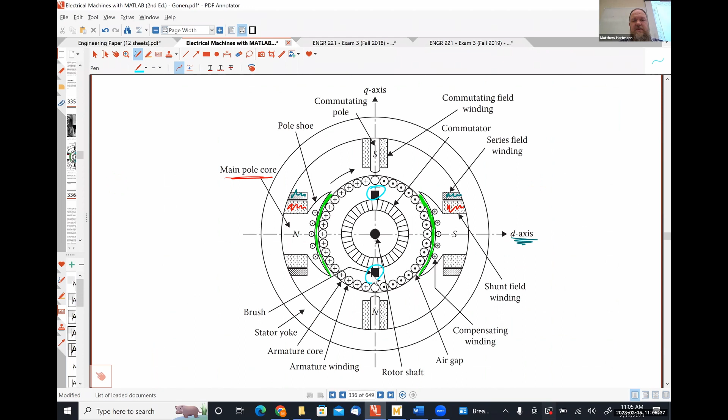close out all these windows for me talking about electric motor stuffs. And then circuits 1 exams.

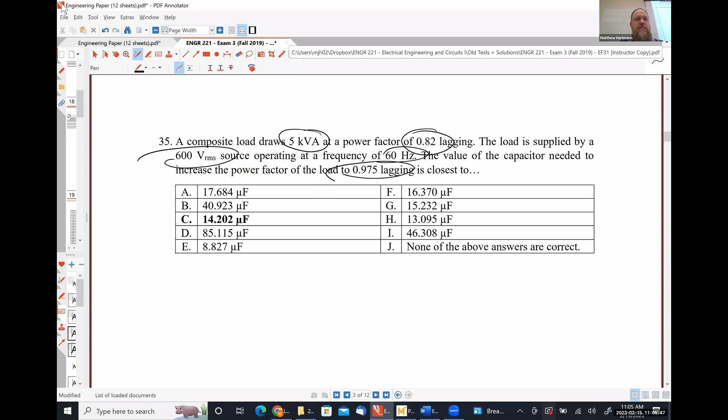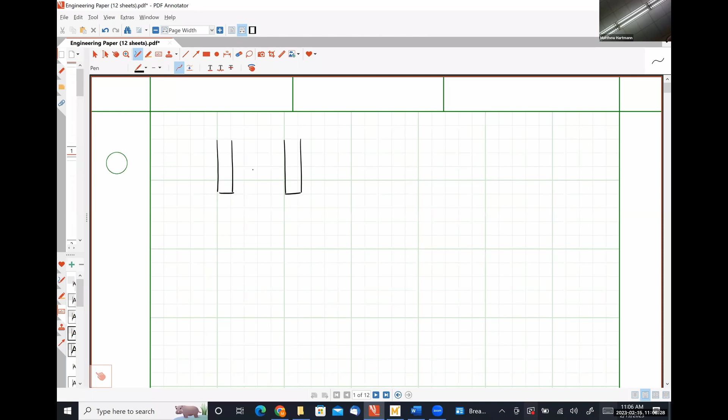So the question that was posed is one of the questions that I posted on the review thing. Why do transverse comb drives suffer from or experience a pull-in effect while longitudinal comb drives do not, right? So in a transverse comb drive configuration, let's say that these are a set of stationary fingers, and then here in the center is our movable finger. So in a transverse configuration, our movable finger is moving from left to right.

And so we see that this distance between our capacitor plates is what's changing, right? And the pull-in effect occurs when we have parallel plates and one of them is moving towards the other. In a longitudinal comb drive, though, we have the following situation, where our direction of plate movement is like so. So the gap between the plates doesn't change. And so the pull-in effect doesn't occur because the gap is remaining constant. Does that make sense? It does.

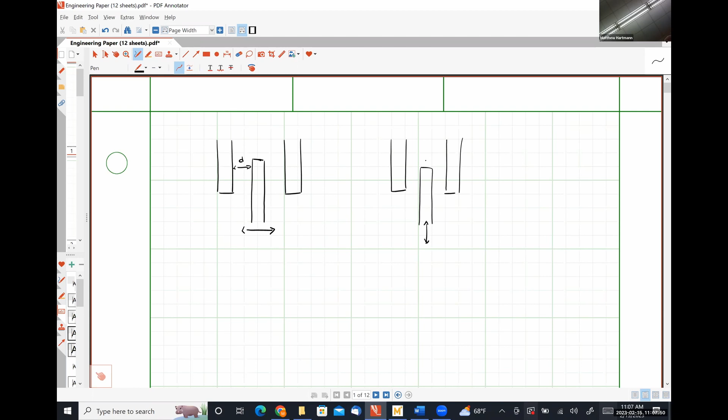I think what was in my mind is that if you allow the comb fingers to go close enough together in a lateral or longitudinal configuration, you can get a pull-in effect from opposite sides. And that's what I was thinking. So you're saying, if it goes far enough towards the opposite side, there's a parallel area there, you get some fringing capacitance. Yeah, so, okay, so that's very fair.

That being said, the areas that you're dealing with there are very small. So you would absolutely have the potential for a pull-in effect, but the force that would be required would require an incredible amount of voltage because of the small area, because you would be seeing a pull-in effect from just this single surface of your finger, right? So not that there isn't one, it's just negligible.

Effectively, yes. So you're 100% right that the fringe capacitance there is going to potentially have some type of pull-in effect if we were to move that finger close enough to this sidewall portion. But it would require a large voltage to actually cause pull-in because of the small area.

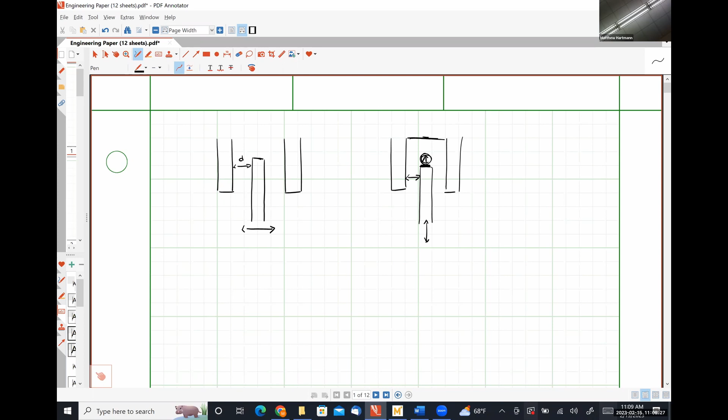And generally speaking, while we do get a relatively large movement in a, let's see, so now I'm trying to think of which one, longitudinal comb drive configuration like this, increasing the area of the plates, we're probably not going to actuate it so far that it comes close to touching that edge, right? Because the gap between these fingers is typically on the order of a few microns, right? To minimize the fringing field, this gap is usually on the order of tens of microns or more. So we would have to induce an extremely large movement in order to get those to be in a place where a pull-in effect would occur. Thank you. Yep.

All right. So we are going to be talking about both longitudinal and transverse comb drives today, because we're going to be working on a problem involving a gyroscope that uses a longitudinal comb drive to provide actuation and a transverse comb drive to sense the effects of a Coriolis force.

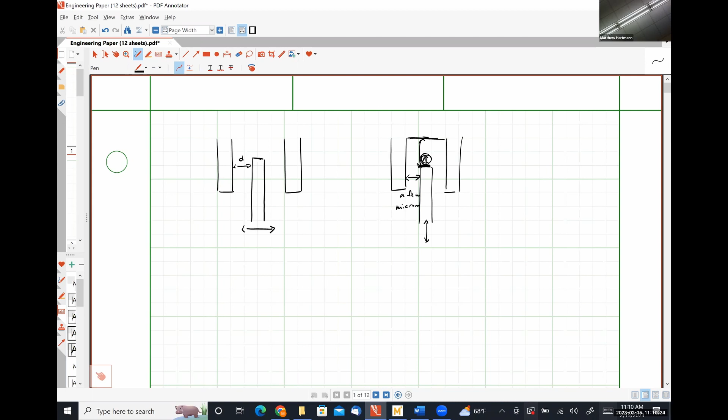So before we talk about that, though, one thing that I want to bring up is that in all of our capacitive actuation schemes that we've talked about previously in this class, DC voltages are utilized. So let's talk about what happens when some combination of DC and AC voltages are used. Effectively, how are we going to get an oscillating force to drive our vibrator, or our resonator? So we know that the electrostatic force, Fe, is the derivative of the energy with respect to position.

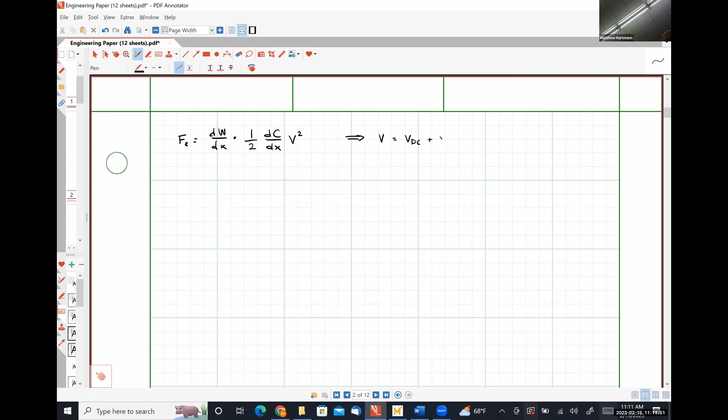And for a capacitor, this is going to look like 1/2 the derivative of the capacitance, where we're assuming that we have a movable or changing capacitance, which is exactly what we have in our MEMS situations where we're undergoing capacitive actuation, times our applied voltage squared. So let's say that V in this case is some DC voltage plus some sinusoidally oscillating AC voltage. So a combination of these two voltages, and then from here we can cover effectively every possible configuration: only DC, only AC, and combinations thereof.

Our electrostatic force, Fe, will be 1/2 times our voltage squared. So that's going to be VDC plus VAC cosine omega t, quantity squared, times our change in capacitance. And if we go ahead and expand out what we have here, we're going to have a term of VDC quantity squared. Then we're going to have our cross term, right? So that's going to be VDC times VAC cosine blah, blah, blah. That's going to occur twice. So twice VDC VAC cosine omega t.

And then we're going to have our AC term squared. Well, to get our AC term squared, we're going to have to use a trig identity here. I'm going to write it in blue really quickly. So if I have A cosine angle 1 times B cosine angle 2, this is going to look like A times B over 2 times the cosine of angle 1 minus angle 2 plus the cosine of angle 1 plus angle 2. So it's just half the product of the magnitudes times the cosine of the difference in the angles plus the cosine of the sum of the angles.

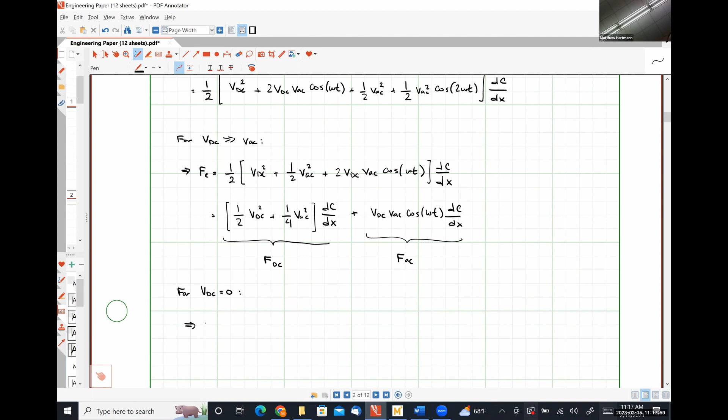For a DC term that is 0, meaning we are only using an AC term to drive our system, our electrostatic force would simply be 1/2 times the 1/2 VAC squared term plus 1/2 VAC squared cosine twice omega t times our change in capacitance. And breaking this up into its constituent DC and AC parts, we have 1/4 VAC squared plus 1/4 VAC squared times cosine of twice omega t. Actually, sorry, I forgot the dC/dx term over here. My apologies.

Once again, we have a DC component of our electrostatic force and an AC component of our electrostatic force. All right, so let's take this and let's look at a gyroscope.

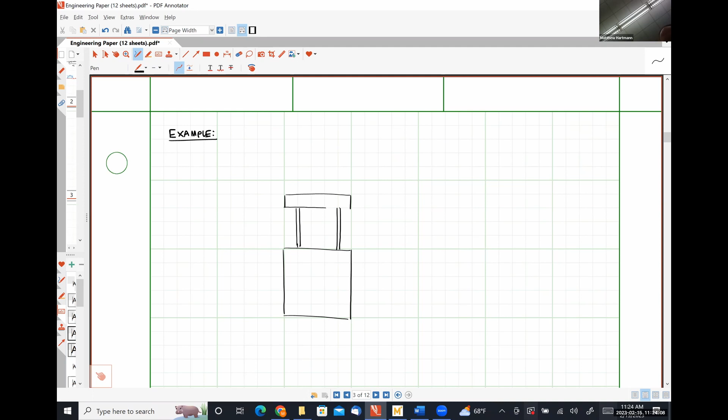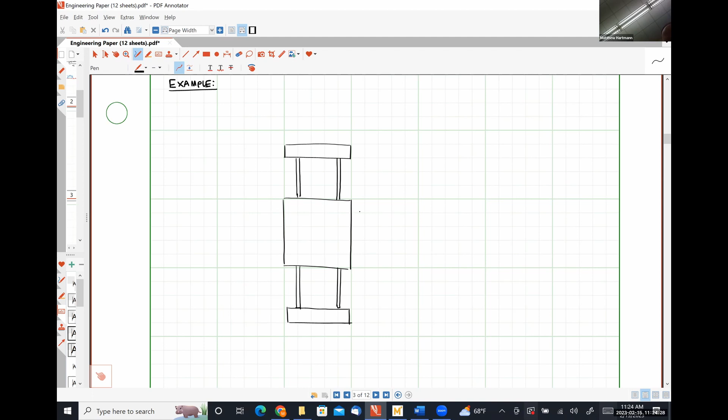So we are going to look at a Z-axis gyroscope. So very similar to what I drew the other day. We're going to have a proof mass here in the middle. These are my drive mode springs that are anchored. So I have this support structure right here. I'm going to have a comb drive actuator on either side of this guy.

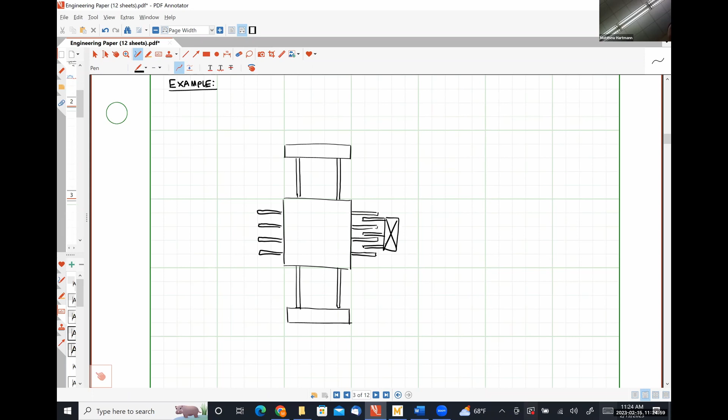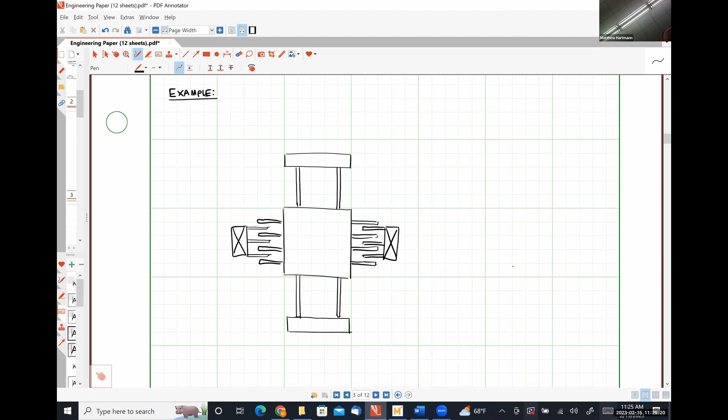So this bit right here represents one of my drive electrodes, and then I've got another set of drive electrodes over here so that I can push it in both directions. So this is my drive structure. Now let's talk about my sense structure. So I'm gonna have springs over here and over here that allow my structure to move in the vertical direction. Same thing on the bottom side.

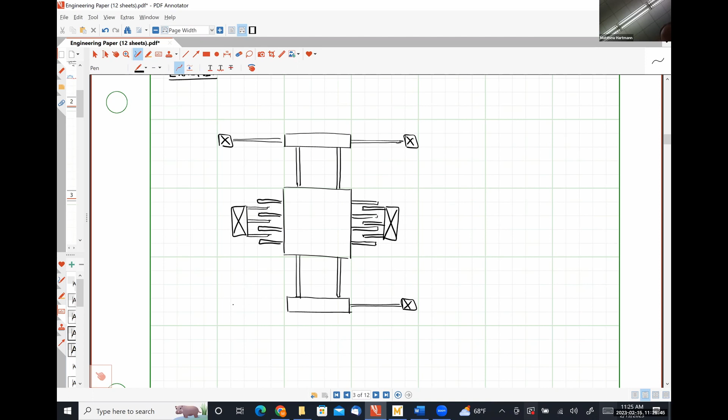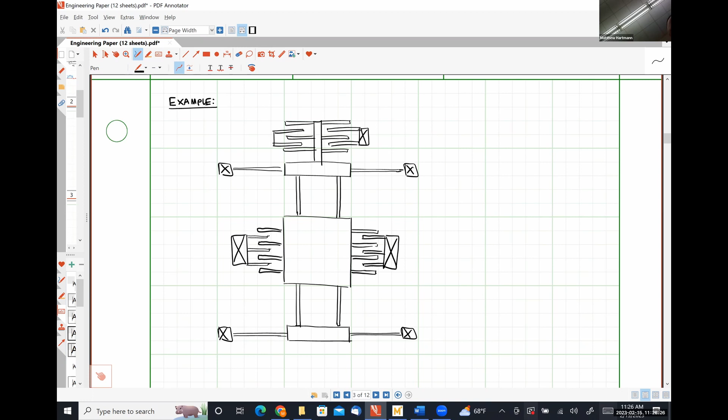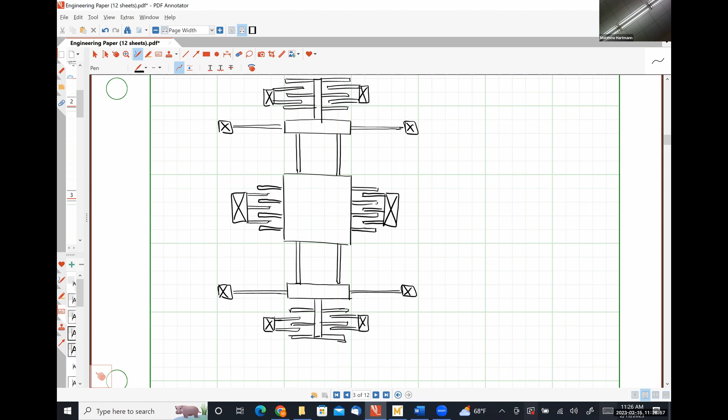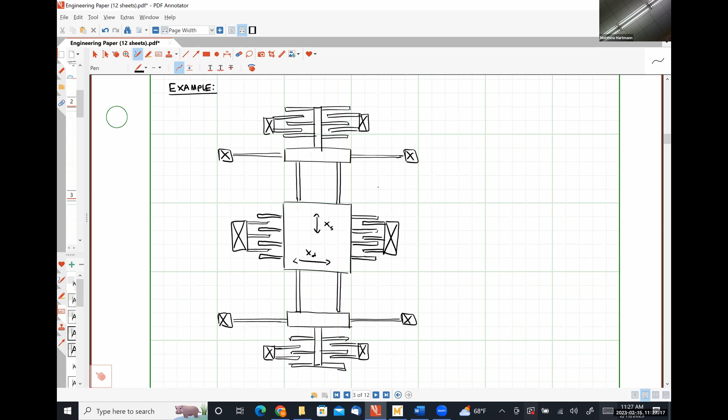And then the real crux of my sense structure is going to be another comb drive on the top, and a similar structure down here on the bottom, like so. So my drive mode direction, XD, is going to occur in this direction, and my sense mode displacement, XS, is going to occur in this direction due to rotations about the Z-axis.

So let's give us some parameters to work with here. This is going to be an extensive list of things. So the mass of our drive mode will be 5 nanokilograms. The mass of our sense mode will be 6 nanokilograms. The reason why we have different masses is in the drive mode, we're just moving this central mass, but in the sense mode, we're also moving this bit up here and this bit up here, which contribute to the mass that the sense mode sees, under the assumption that the springs are effectively negligible.

The total spring constant for the drive mode, 0.8 newtons per meter. The total spring constant for the sense mode, 3.8 newtons per meter. The total number of fingers for our drive mode comb drive is going to be 100 per drive. And then I think I just did 20 fingers in total for the sense mode. Our quality factor for the drive mode is 50. Quality factor for the sense mode is also 50, quite low.

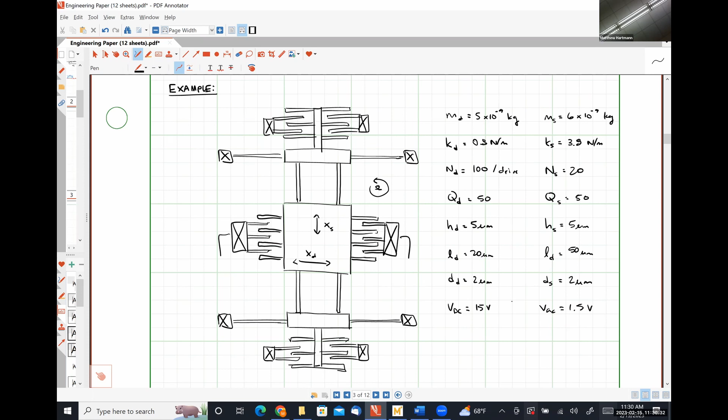And then for our sense mode comb drive, we have a height of 5 microns, a length of overlap of 50 microns, and a nominal gap of 2 microns as well. Let's see what else you guys need to know. We're biasing this thing, so our central structure has a bias voltage of 15 volts. And then we're going to use an AC drive voltage on our drive electrodes here and here of 1.5 volts to induce our movement.

And our goal for this monstrous thing is to calculate the maximum change in capacitance experienced by the sense electrodes due to an angular rotation of omega equal to 50 radians per second, which is extraordinarily fast. We're spinning the hell out of this stuff. All right.

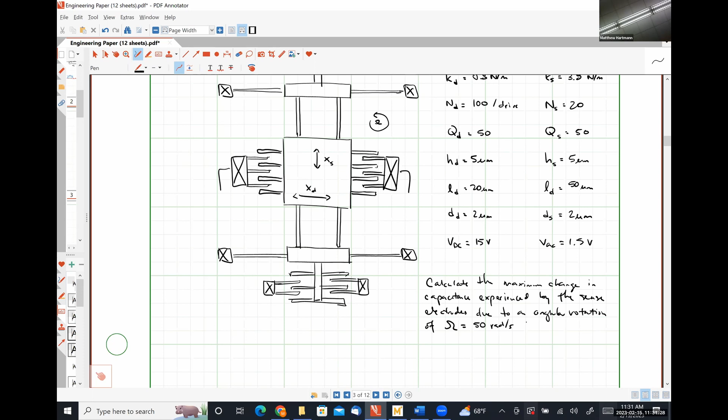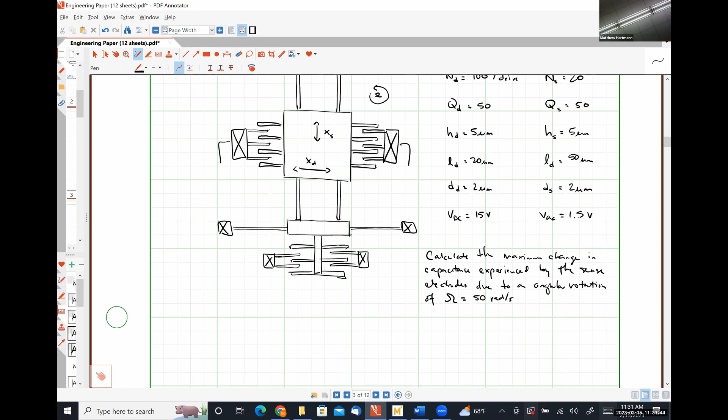So we know that our capacitance in our sense system is going to depend on the displacement that we experience in our sense direction, right? So effectively, our sense mode is a transverse comb drive, where these electrodes, let me put a red arrow here, are going to move either closer to or further away from the stationary electrodes here, depending on the amplitude of the sense vibration. The sense vibration in turn depends on the Coriolis force, and the Coriolis force in turn depends on the drive mode vibration. So that's where we're going to start. We need to figure out what our drive mode vibration is.

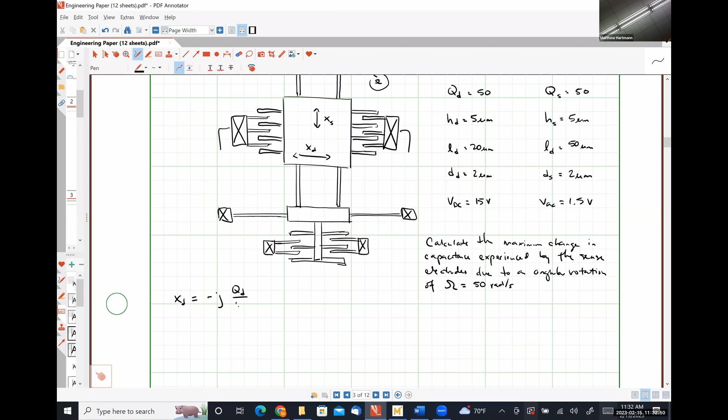So our drive mode vibration, we're assuming that we're going to operate this thing at the resonant frequency, mechanical resonant frequency of our drive mode. So we know that XD should be approximately -J QD over KD times, I'm putting in here the magnitude of our AC force, because that's going to be our maximum displacement that we see. All right.

So what's the maximum value of our AC force going to be, right? So if we go back here, this is the situation that we have. We have a DC voltage and then an AC voltage superimposed on top. So we're going to use this particular equation where we're going to have to figure out what dC by dx is. I'm going to double this force because we have 2 drive actuators.

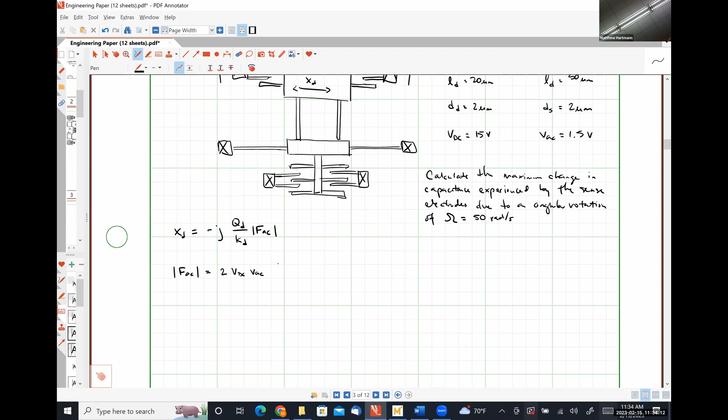So this is 2 VDC VAC, and then everything else, derivative of dC by dx. So what's that dC by dx term going to look like for a longitudinal comb drive? So the capacitance of a longitudinal comb drive is, trying to remember, it's 1N or 2N. Let's just say N epsilon, then my force is twice as small as it needs to be because I forgot to include that second factor of 2 in my math, but okay, we'll get to there.

So N times H times L plus X over D, and then there's two capacitances for every overlap, one to the left and one to the right. So that's going to make that twice as long, which is just going to make everything else scale by that same factor of 2. So that's not going to be too bad of a deal.

So if we were to take the derivative of this thing with respect to X, that's just going to give us, let's call it 4 now, VDC, VAC, N epsilon naught, because our permittivity is air, times the drive height divided by the drive gap. Does that make sense? Okay.

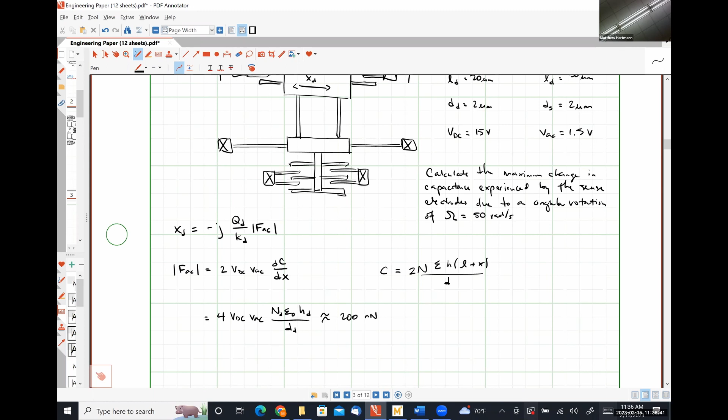Plugging in this value here, we wind up getting a displacement that is going to be negative J, so let's see, 6.225 times 2 is going to be 12.450 microns. Okay. Where the factor of negative J simply means that our displacement lags the application of our force by 90 degrees. So that 12.450 microns is effectively the maximum displacement that we would see as we oscillate back and forth.

Okay. So we figured out what our drive mode displacement is. We could figure out what our Coriolis force is, but I'm not going to because we developed an equation for the sense mode frequency response where we had already substituted that result in. So what we need to figure out now is this a matched mode gyroscope, a separated mode gyroscope, or potentially neither? And in this case, it's going to turn out to be neither, and we'll talk about that in a moment.

So omega naught D is simply the square root of KD over MD, which comes out to be 12.649 kiloradians per second. Omega naught S, simply KS over MS, comes out to be, where do I have this written down? 25.166 kiloradians per second. So the modes are very much not matched. Omega naught S is definitely larger than omega naught D, but I don't know that I would call it significantly larger, right?

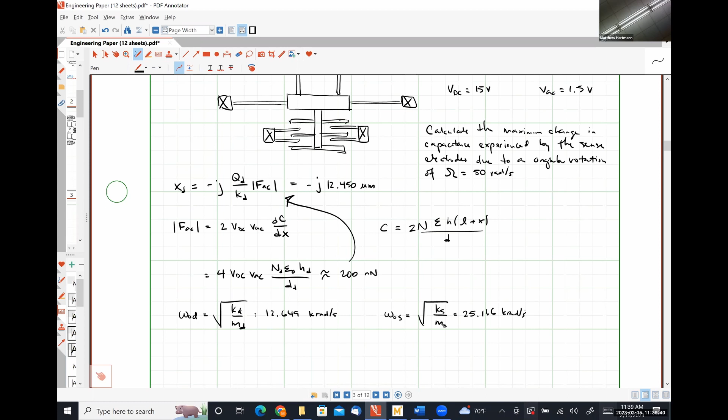Right. So I solved this thing using MathCAD to get my displacement. And then I also looked at what the approximate values would be if we were using separated modes. And they are pretty similar, but I want to go through it here, right? So because I can't gut reaction say omega naught S is significantly larger than omega naught D, I evaluated XS using the following expression. -1 over MS, and this is just what we derived the other day.

And I get twice MD XD capital omega. Our operating frequency here is omega naught D, so we have omega naught D squared times omega naught S over QS, divided by omega naught S squared minus omega naught D squared, plus omega naught D omega naught S over QS quantity squared, minus J twice MD XD capital omega naught D, omega naught S squared minus omega naught D squared.

All of that is divided by that same denominator, omega naught S squared minus omega naught D squared plus omega naught D omega naught S over QS quantity squared. And putting this again into MathCAD, I got 13.86. Actually, this should be twice this large, because you know what? Let's make sure I'm not screwing something up here. Let's just look at the MathCAD sheet.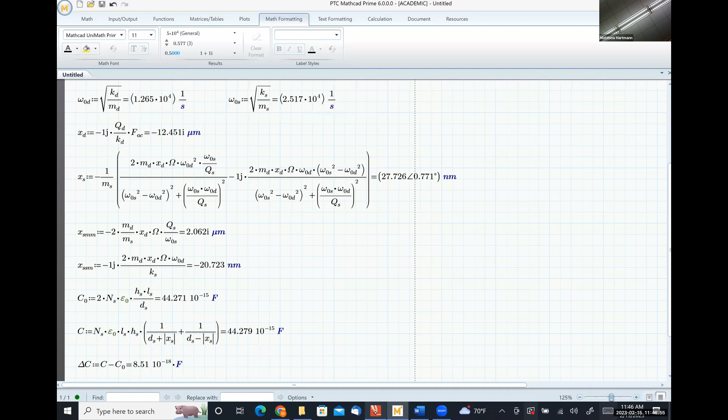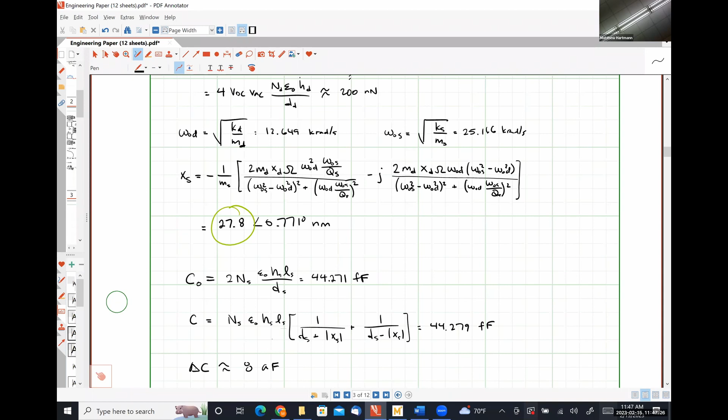And so our change in capacitance is approximately 8 attofarads for this system, 10 to the negative 18 farads. Okay. That's an incredibly small change in capacitance because we're getting an incredibly small displacement in our sense mode. So what can we do to increase the sensitivity of this device? There's a couple of very obvious things. I'm going to scroll up here to our parameters. Yeah, that's the biggest one. Making it way more fingers. 20 fingers is an incredibly small amount of fingers to use for any type of capacitance sensing.

We could also increase the number of fingers in our drive, if at all possible, to induce a larger displacement using the same voltages, which would in turn give us a larger sense mode displacement as well. So the biggest change that we could make would be to cram more fingers on this thing, if at all possible. What's something else that we could do? Q of 50 is absolutely terrible. You're right. So if we were able to design this thing to have a significantly better quality factor, even 1 order of magnitude better would get a significantly larger response out of this system. What's something else that's kind of obvious here?

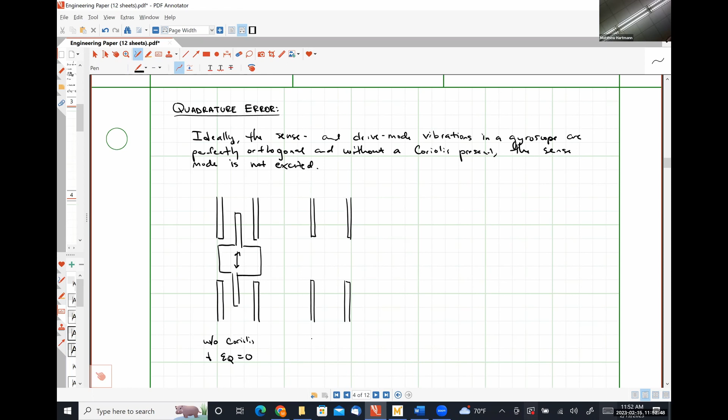If we had a Coriolis force present, so this is going to be with Coriolis, and our quadrature error term is equal to 0, what is the path of the mass going to look like? You guys have any thoughts? Elliptical. Yeah, so it's going to have movement in both the X and the Y direction. So we're going to have some sort of elliptical movement. Okay.

So now let's revisit our first picture. I'm not going to try to draw what happens when we have quadrature error and a Coriolis force because it's just going to be a wonky looking thing. So this is what the effects of quadrature error will do. Okay. So let me explain more what quadrature error is. Quadrature error represents a mechanical coupling between the drive mode vibrations and the sense mode vibrations caused by manufacturing error for the most part, right?

So if one of our springs isn't exactly as stiff as the other springs in our system, and so this is going to be without Coriolis, and quadrature error term is going to be not 0, what we're going to have is instead of perfectly vertical motion, we're going to have slightly skewed vertical motion that has some horizontal component. Excitation in our sense mode without the presence of a Coriolis force, right? Which is problematic for when we're trying to measure the Coriolis force, which we have seen is incredibly small.